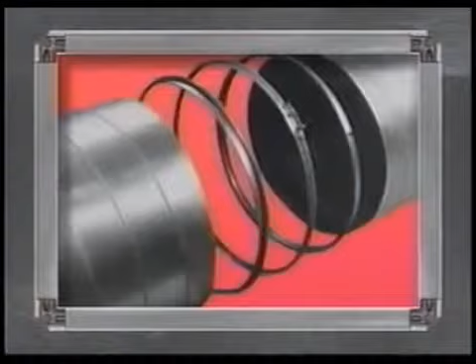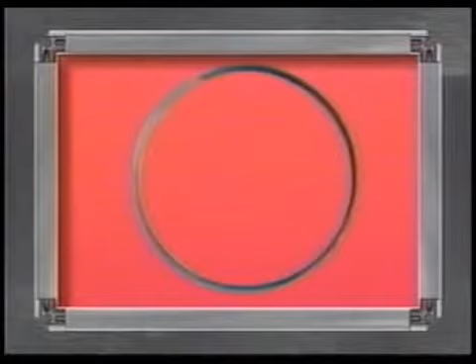The patented Spiralmate round duct connection system, available in a wide variety of standard and specialty metals for almost any application, consists of 2 precision roll-formed flange rings with an integral mastic pocket designed for use with both spiral lock seam and longitudinal seam round duct, a precision roll-formed closure ring with single bolt construction allowing for quick and easy completion of the connection in the field, and a closed cell neoprene gasket specially engineered for the needs of the Spiralmate system.

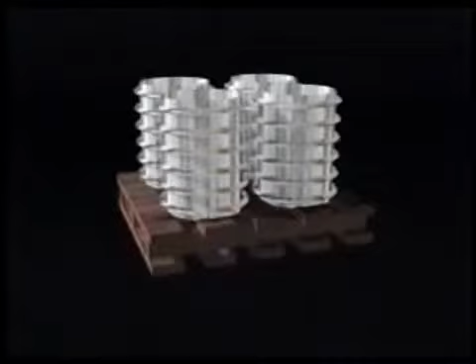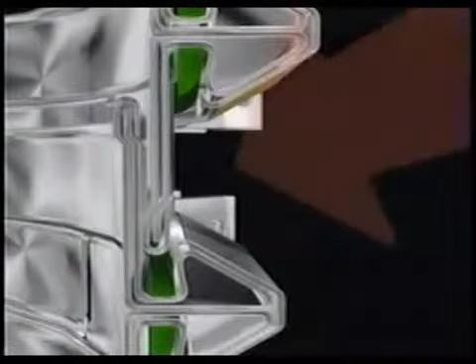The joint systems are shipped assembled and are usually nested on pallets for economical handling costs. Care must be taken when unpacking the connectors to ensure that the legs of the flanges do not slide into the mastic pockets of adjacent flanges. This can cause damage to the mastic, which must be recaulked with a compatible sealant before installing the flange on the duct.

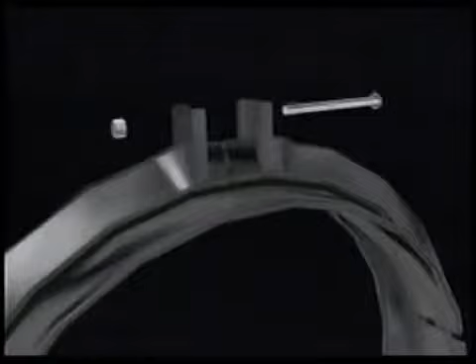Loosen the nut and bolt from the clip assembly on the closure. Expand the closure ring and remove again. Care must be taken to ensure that the flange pockets are not violated. Remember, when preparing and handling, do not allow legs to damage mastic. If mastic is damaged, it must be recaulked before installing.

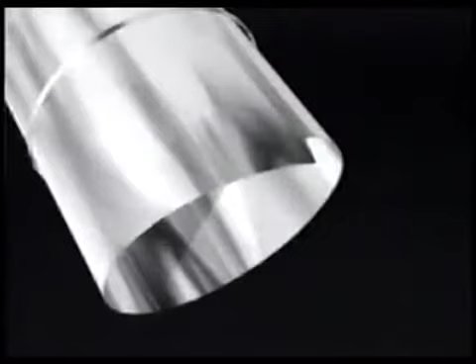Before you begin, you should examine the duct. In the unlikely event that a severe offset is present on the duct from slitting during fabrication, trim the duct as needed so that the flange can be seated properly.

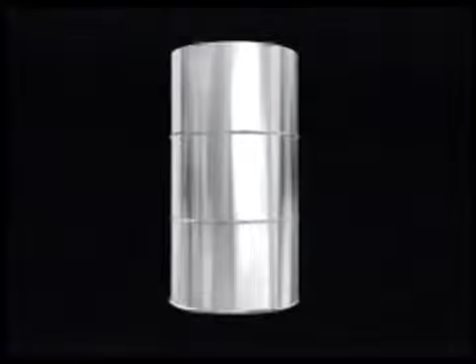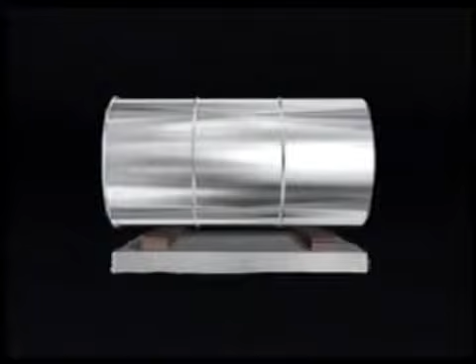Flange may be installed with the duct in either the vertical or horizontal position, depending on duct length. When installing horizontally, the duct must be propped at both ends at least 1 1/2 inches from the ground to allow for clearance of the flange. 2x4s or a set of rollers are ideal for this purpose.

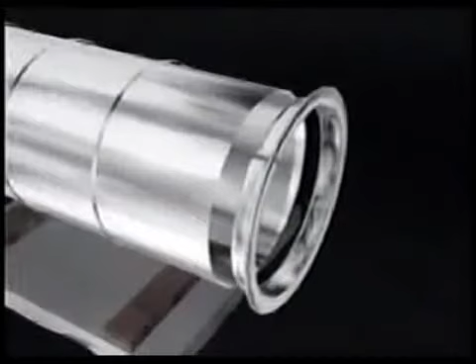Start the inner flange by inserting the duct end into the mastic pocket at the break in the ring. Seat the flange properly with a mallet so that the leading edge of the duct is seated in the pocket of the flange and penetrates the sealant, establishing metal-to-metal contact when possible.

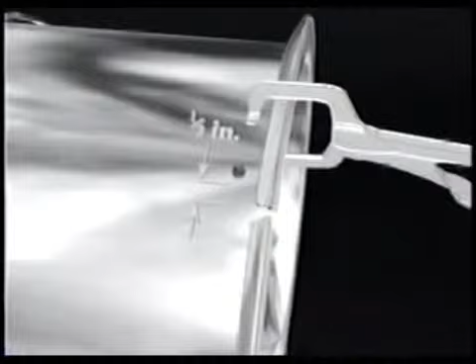Clamp the flange to the duct with a vice grip, positioned a few inches from the break. Begin securing the leg of the flange to the duct section by placing a screw, spot weld, stitch weld, or pop rivet 1/2 inch from the break in the flange. Make certain fasteners are properly oriented on the leg of the flange.

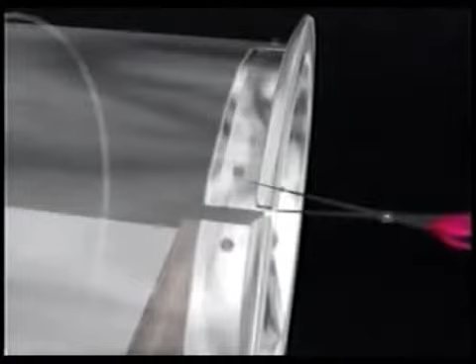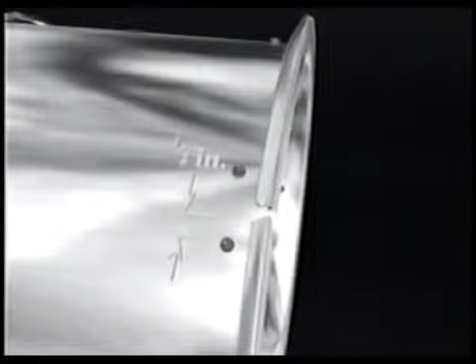Continue clamping and fastening in one direction around the duct at evenly spaced intervals as noted in the installation and assembly manuals, again establishing metal-to-metal contact when possible. If duct is undersized and there is no break in the flange, cut between the flanges so that a break is visible. This is important because the 440 gasket must bite into the leading edge to create an airtight seal. Place the fastener within 1/2 inch of the end of the flange ring.

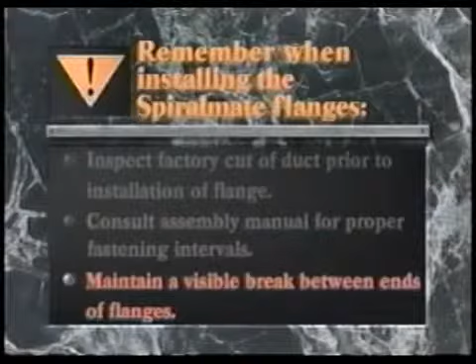Remember, when installing the Spiralmate flanges, inspect factory cut of duct prior to installation of flange. Consult assembly manual for proper fastening intervals. Maintain a visible break between ends of flanges. Before applying gasket, be sure that flange faces are free from dirt and debris.

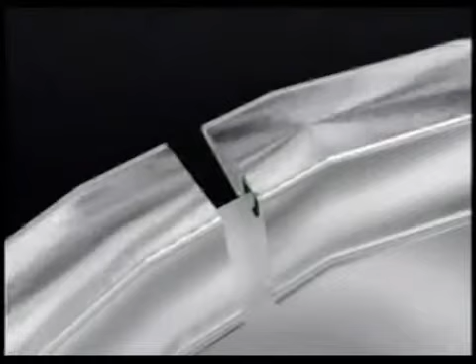Firmly press a short piece of 440 gasket over the visible break, covering the raw edge of the duct on both mating flanges. Begin applying the neoprene gasket away from the break in the flange, continuing around the entire circumference of the flange face.

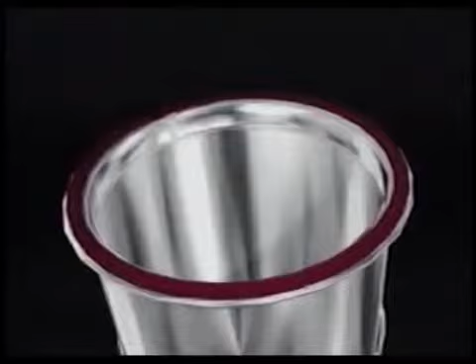When using the small profile, the gasket will be slightly larger than the face of the flange. Keep it flush to the outside of the flange face. When using the large profile, again keep the gasket flush to the outside of the face of the flange.

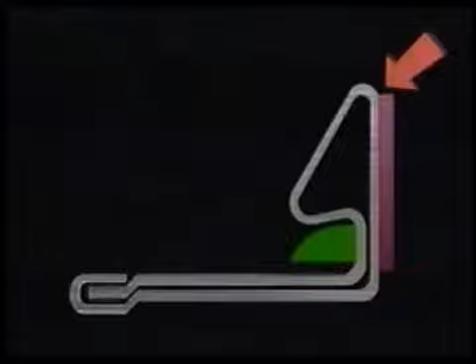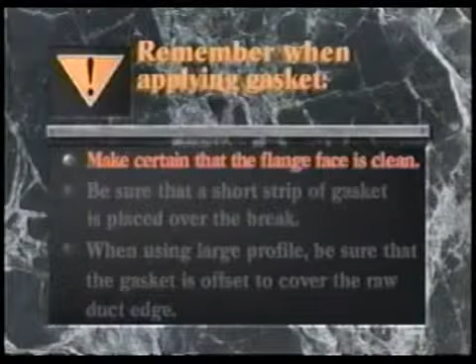At the break in the flange, the gasket must be offset to cover the raw duct edge. Where the gasket meets, the ends should be butted together. Remember, when applying gasket, make certain that the flange face is clean, and be sure that a short strip of gasket is placed over the break. When using large profile, be sure that the gasket is offset to cover the raw duct edge.

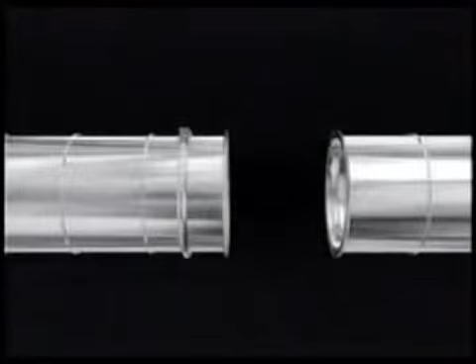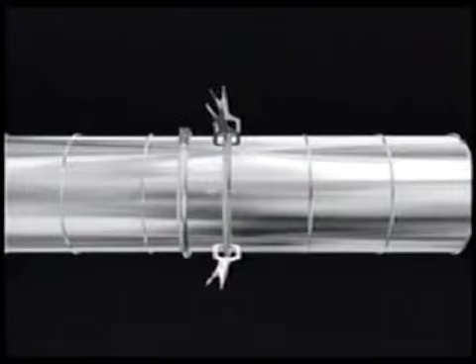To complete the connection, draw the ducts together using Ductmate alignment grips to obtain adequate alignment and gasket compression. Larger diameter ducts may require additional grips. Alignment grips must be used to make a proper connection. These can be purchased from your Ductmate distributor or fabricated in your shop.

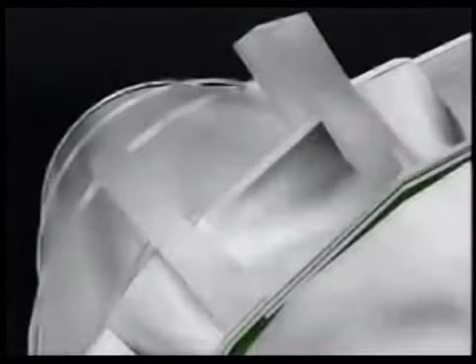Separate the ends of the closure ring and begin feeding one end of the ring around the flange and through the alignment grips. Before inserting the bolt, be sure that the short leg of the closure ring is over top of the long leg. Tighten the bolt on the closure ring until it makes even contact around the circumference of the flanges.

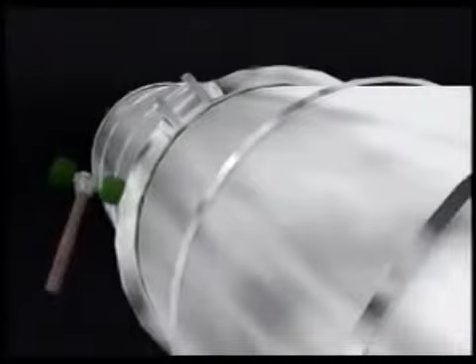Periodically tap the closure ring with a mallet to help create an even draw. Remove the grips and continue tightening the bolt, again periodically tapping the closure ring.

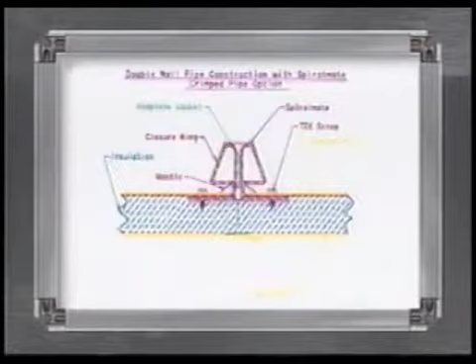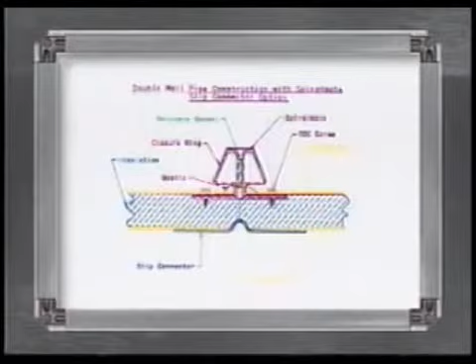When using Spiralmate with double wall duct, the inner liner is joined using conventional methods. The outer connection is then completed as for single wall ductwork. A complete airtight round duct joint is created with no need for external sealant, fast, neat, and clean.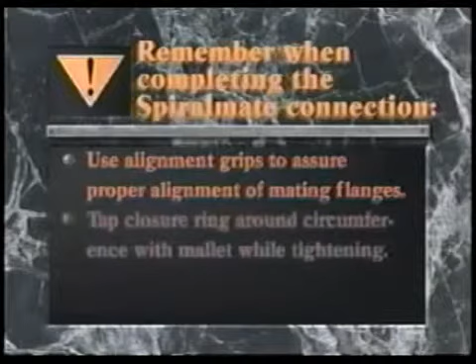Remember, when completing the Spiralmate connection, use alignment grips to assure proper alignment of mating flanges, and tap the closure ring around the circumference with a mallet while tightening. On duct sizes 72 inches and larger, consult the factory for additional assembly and installation information.

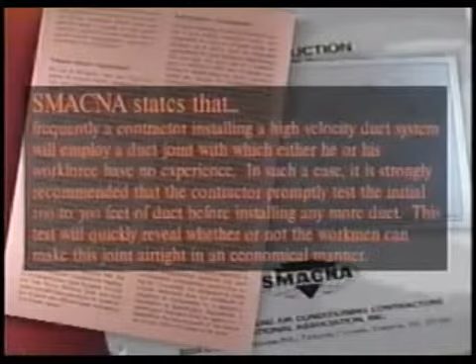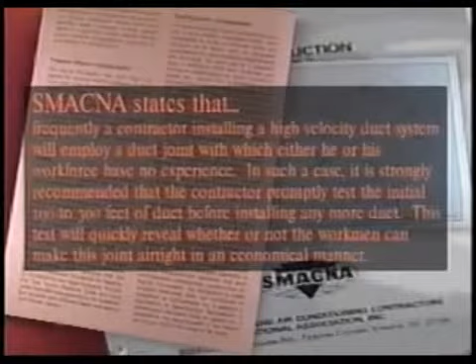SMACNA states that frequently a contractor installing a high-velocity duct system will employ a duct joint with which either he or his workforce have no experience. In such a case, it is strongly recommended that the contractor promptly test the initial 100 to 300 feet of duct before installing any more duct. This test will quickly reveal whether or not the workman can make this joint airtight in an economical manner.

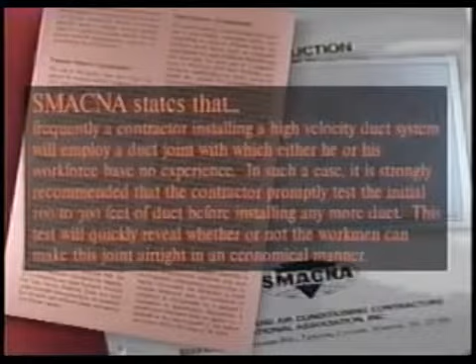For application assistance, contact Ductmate at either the East Monongahela office or the Stockton, California office. Ductmate Industries has also developed products and accessories to simplify the installation and assembly of duct systems.

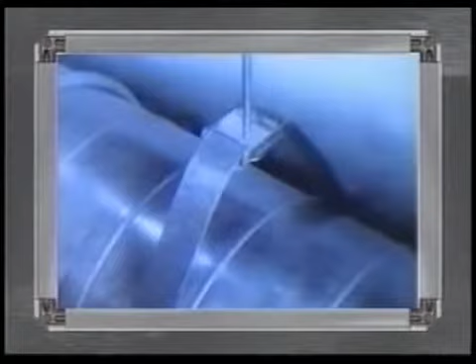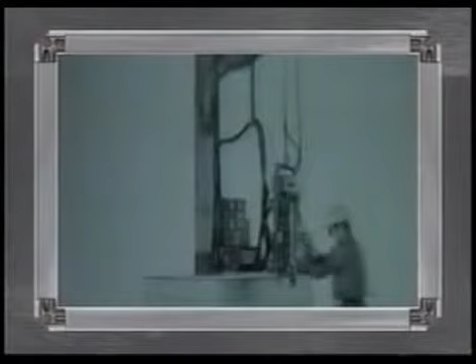The strap bracket is the ideal way to hang round ductwork. No tools are needed because the steel strap is hand-bent into the bracket, which is self-locking. Ductmater combines the seating of the Ductmate frame and the securing of the frame by spot welding into one simple robotic operation.

The Ductmate repeater with sequential trip is a revolutionary fastening tool. Powered by compressed air, the repeater is a combination pneumatic nailer and screwdriver. It is capable of production rates in excess of 1 fastener per second, and the magazine holds 100 fasteners per loading.

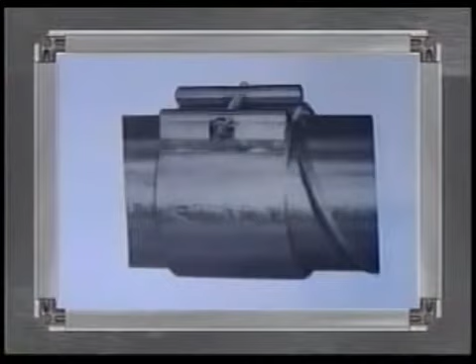The quick sleeve round duct connector is the perfect airtight connection for round or spiral duct, 3-inch through 14-inch in diameter. Duct can be assembled easily. No end preparation is necessary. No protrusions enter the airstream. This is ideal for ducts carrying dust.

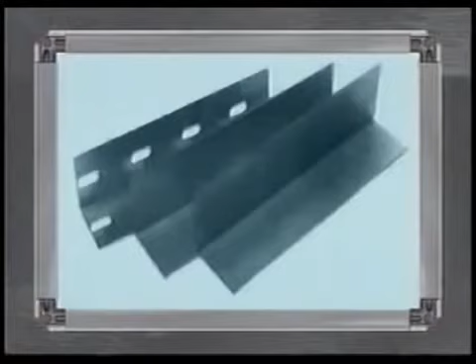Roll-formed angle: pre-punched, roll-formed galvanized angle, available in a wide variety of SMACNA reinforcement classifications. This convenient product can be used for reinforcing, brackets, stiffeners, bracing, and hangers.

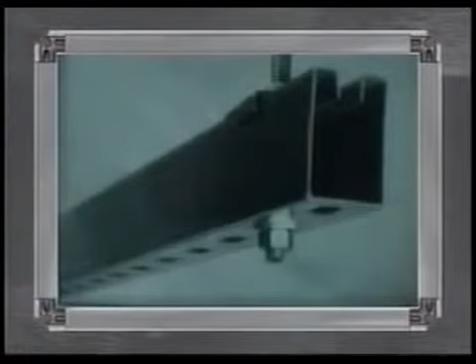Trapeze hanger: a pre-punched channel-type hanger system which allows for simple, easy hanging of ductwork and small equipment. Optional hanger accessories include isolation pads, isolation hangers, and beam clamps.

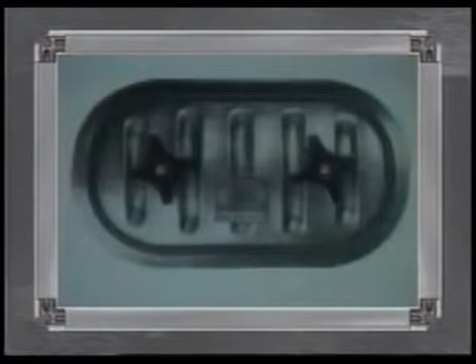Access doors: a simple, economical door which provides easy access where necessary. The principle of construction is similar to access doors for high-pressure vessels, which allows for sealing under both positive and negative pressures.